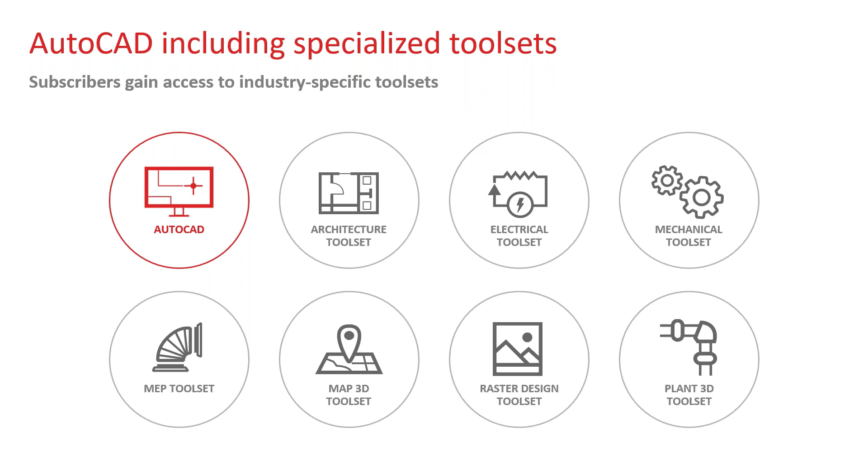So let's jump into what we're going to be doing today. Some of you may already be using full AutoCAD, the desktop AutoCAD, and you may have noticed now that you have these specialized tool sets that you can see on the screen at the moment - architecture toolset and so on. Also in that subscription, you get access to the AutoCAD web app.

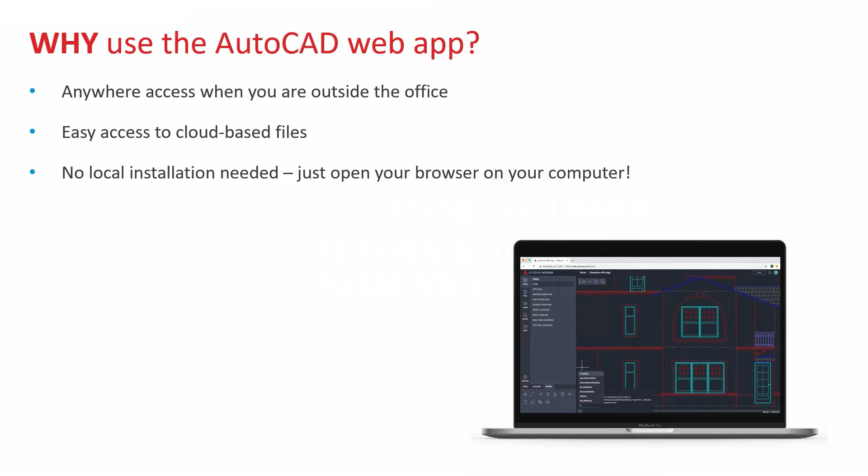First thing we're going to look at is visual fidelity. You may recognize this from a little while ago when we were doing things like annotative scaling and so on, but it's also all about how one interface looks like another. We want to make sure that the web interface of the web app is the same as your desktop interface.

It's a case of spot the difference, though it is obvious which one is which. The left-hand picture is obviously the web app, and the right-hand picture shows the ribbon of AutoCAD 2021 desktop. But I want you to look at things like the grid lines, the dimensions, the grid bubbles, the stairs and the desks. You can see they are exactly the same, and that visual fidelity is really important, because what you've got in a browser is the same quality of visualization that you get in the desktop app.

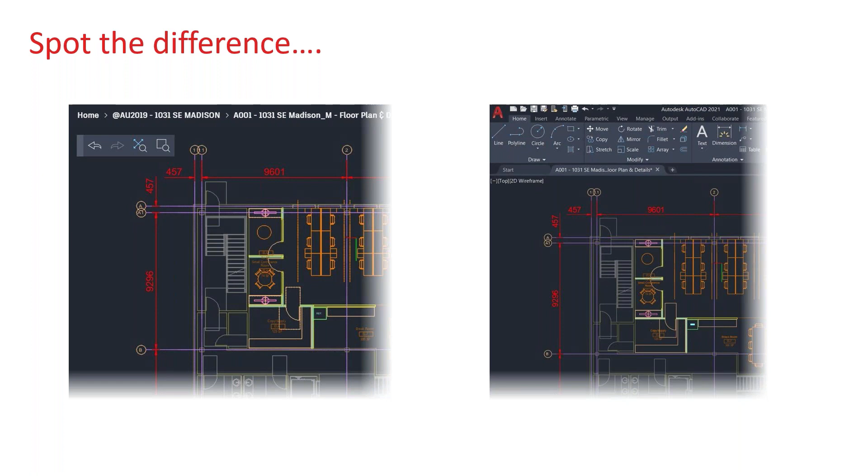Signing into the AutoCAD web app couldn't be easier. It's in a browser - you go and pick your browser that you want to use, Google Chrome, Mozilla Firefox, Microsoft Edge as well. I recommend you always make sure you've got the latest version, and it's a one-off URL, web.autocad.com. Easy to remember.

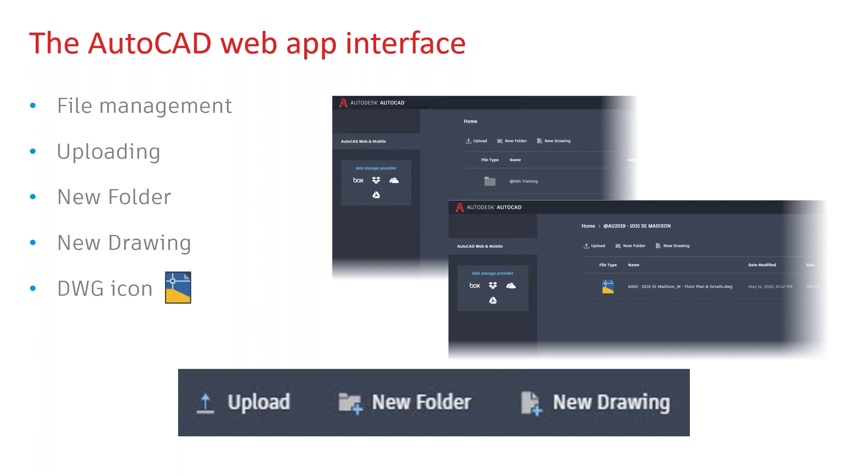Now, the web app interface, when you log in, file management is easy. You can upload files quickly and easily, set up new folders, and set up new drawings. What's really nice though is you can always spot a DWG in your web app - you can see that little blue and yellow icon in some of the screenshots I've taken, showing you're looking at the files in the web app itself. At the bottom of the slide, you've got the upload, the new folder, and the new drawing as well. So the interface is really simplistic, really easy to get to grips with.

Drafting in the AutoCAD web app, you'll recognize some of these icons straight away from your desktop app. In the Draw tab, you've got rectangle, circle, arc, line, polyline, and hatch. And the web app development team have been busy, because I noticed when I logged in today there are even more commands available on the Draw tab - you now have spline and X-line, the construction lines as well.

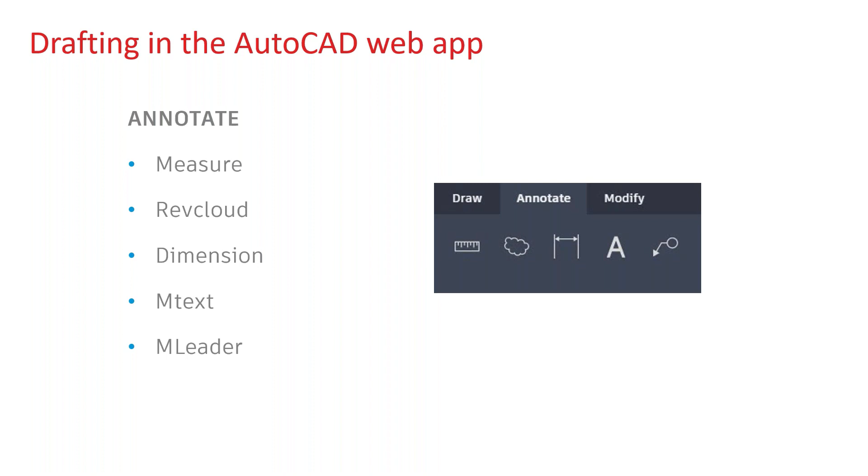Moving along to the Annotate tab, you've also got Measure, RevCloud, Dimension, MText, and Multi-Leader there. And in Annotate now as well, which isn't in the slide, you've got Viewports - that was another new one that I noticed today.

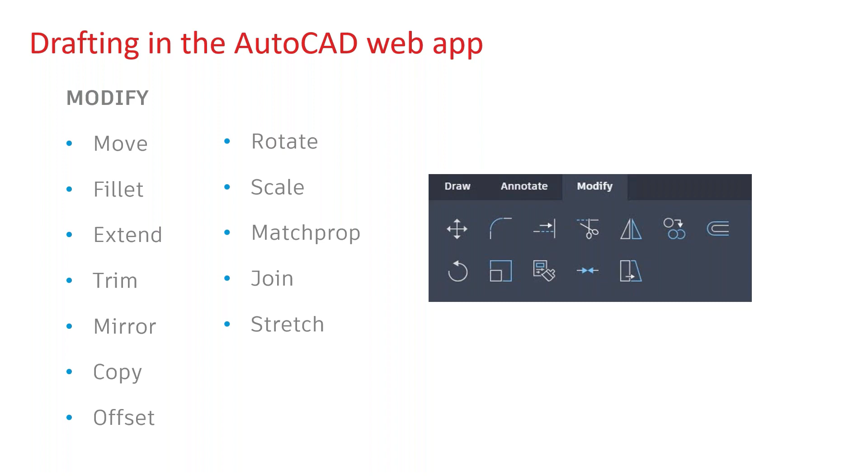Then moving along to Modify, more commands in here obviously, because you tend to spend a lot of your time modifying drawings, both in the desktop app and also in the web app. When you're working in the web app, you could be on site modifying drawings to as-built or something similar. Again, you've got a nice big long list of easily recognizable commands - things like move, rotate, extend, trim, and so on. There's also explode and erase, which are new - the web app team have added those and I noticed those today too. So they're keeping busy and developing the web app all the time.

Now let's have a little look at this. I'm going to run a little video now so that you can see how the visual fidelity and the interface and the drafting all work in the web app. So we'll be jumping into some videos as we go through the presentation. I'm just going to literally jump in and hit the play button for you, and you'll see my little pointer move around.

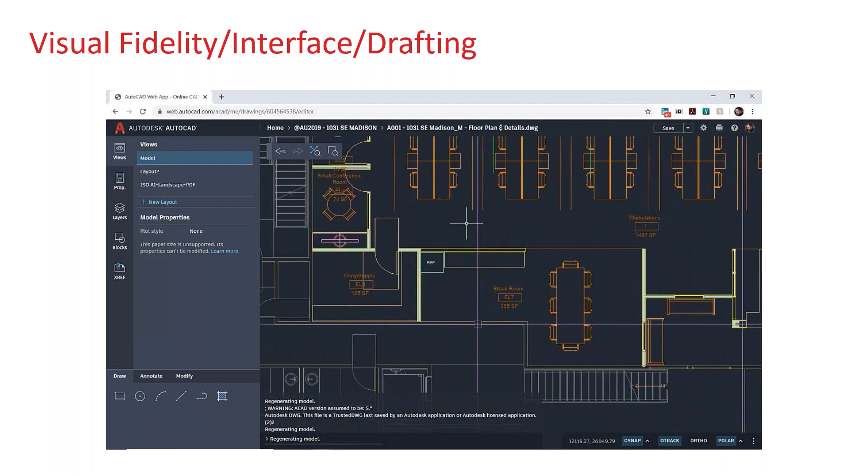So you can see I'm jumping into the folder, finding my DWG file. It's just a case of double click, and it opens up like so. You can see we've got a drawing in there, a plan with the grids, the dimensions, and so on. If you look on the left-hand side, you can see all your tabs - views, properties, layers - and you can zoom in and zoom out just like you would in the desktop app. You'll notice panning there as well. The actions are exactly the same in the web app as they are in the desktop app.

So I'll jump into the Draw tab and use the line command as you would normally when you're drafting and making changes. You'll notice it kicks in the command line as well, and you've got object snaps too. You'll notice that the visual interface, the visual fidelity there, is incredibly similar to the desktop app. So we're just drawing lines using our endpoint snaps and working our way through the drawing, making the changes that we need to make - another line there, and what we're doing is tidying up the hot desking area in the plan.

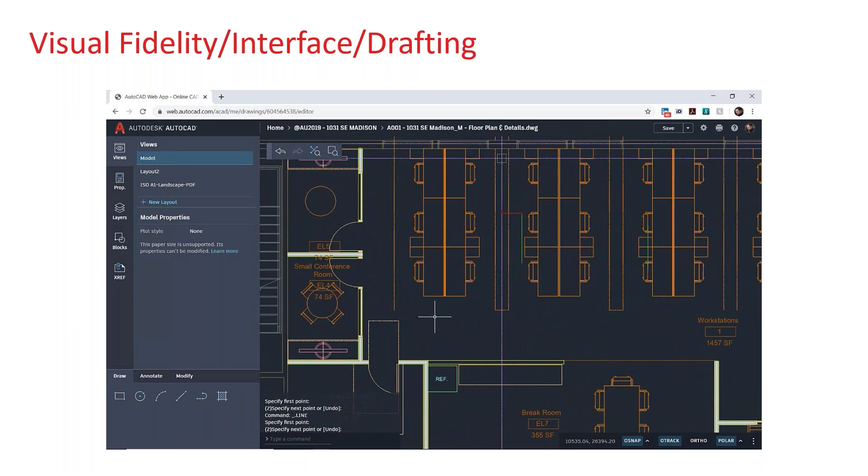And you can see as I've come away there, press enter, and it ends the line command, just like the desktop app. And as you can see, I'm panning and zooming around the drawing. That functionality is exactly the same - it's the same mouse movements, the same moving up and down on the wheel.

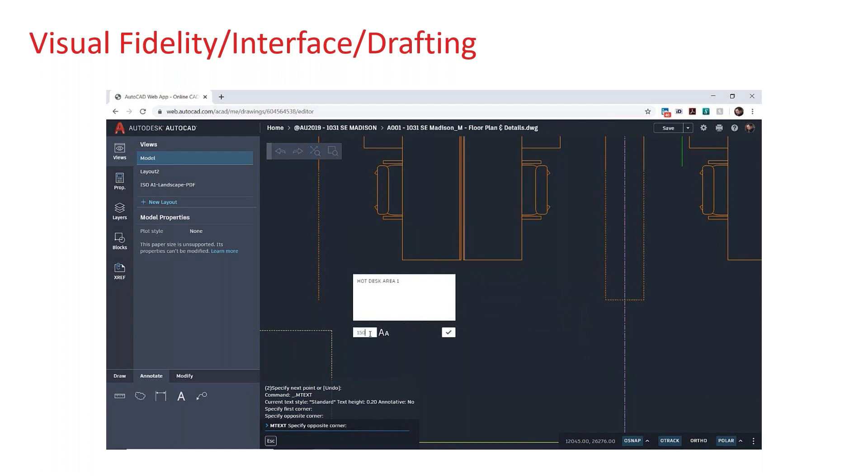So I'm going to pop some multi-line text into the drawing, and you'll recognize the box with the downward arrow, setting the area for the M text. This is where it's slightly different though - I'm typing in my multi-line text in the entry box, typing in Hot Desk Area 1, and updating the text height to 150 because this drawing is in millimeters.

And you can see it comes in with that simplex font that we all know and love. So I jump into the Properties tab, select my text, it highlights with the grips as normal, and I can change my text style to something like Arial, which gives that good old Arial font - it just looks much cleaner. You can see that the actual visual fidelity of the text is the same as the desktop app as well.

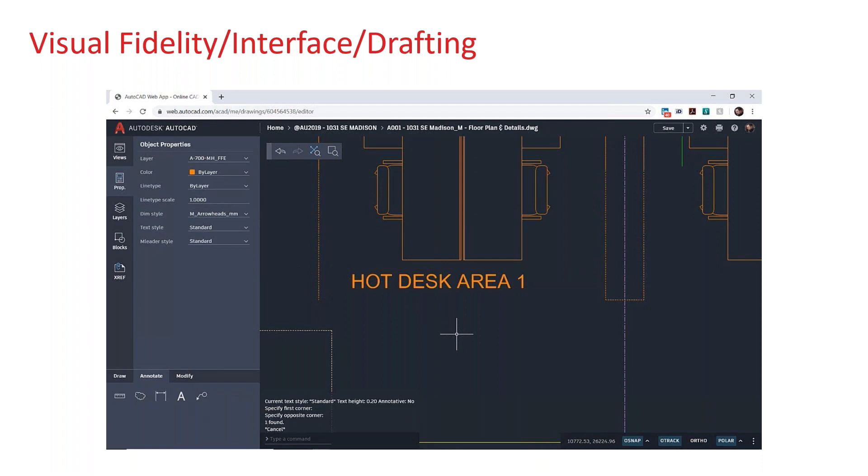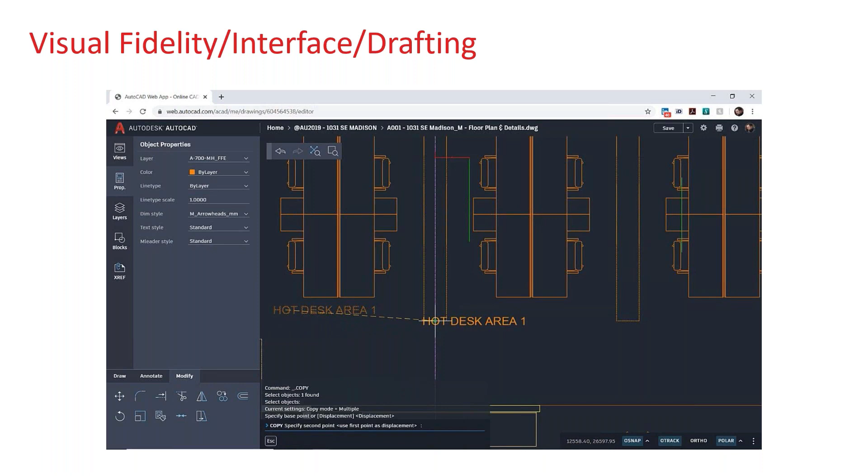Moving along, we'll add some more text. We jump into our Modify menu and copy our Hot Desk Area 1. Again a pick box appears, you select the text, press enter to confirm selection on the command line. All I've got to do now is pick a point on the text - I'm not going to worry about an object snap, I'll use my polar tracking to move it across to the right and click on a spot, then press enter to finish.

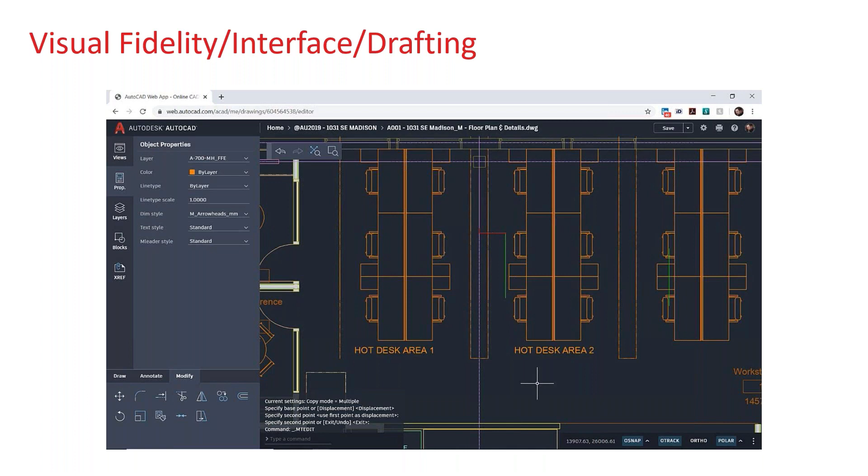Then it's just a case of editing the text, and again it's just a double click on the text, just like in the desktop app. So I'll change that to Hot Desk Area 2, check the height's okay, and tick the box. Job done. You can see it's really easy to edit your annotation and objects in your AutoCAD drawings when working in the web app - very quick, very easy, and the best bit is that visual fidelity is exactly the same as your desktop app.

So let's jump along and move to the next slide. The second thing I want to talk about is cloud-based storage. I'm pretty sure most of you are using this already - something like Dropbox, Box, Google Drive, or Microsoft OneDrive. Now the good thing is, Google Drive has now been added to the list of providers that work with the web app.

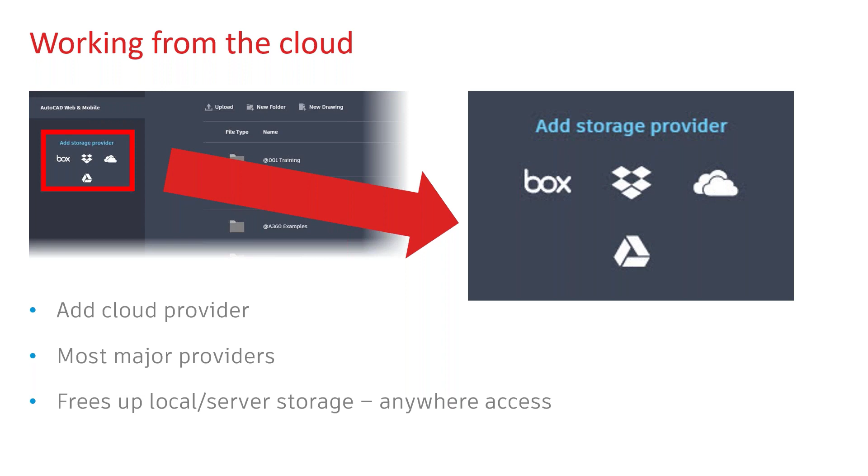When you're working from the cloud, everything can be stored remotely. You can add your cloud provider to the web app - it supports most major providers. You can see we've got Box, Dropbox, OneDrive, and Google Drive. The best bit is it frees up your local and server storage - it's anywhere access. You're storing it remotely from your laptop, remotely from your server in the office. It's in the cloud and you can access it anywhere you want. That's the best bit, the anywhere access.

As I said, Google Drive is now available, so you can easily access your DWGs in Google Drive as well. We've now got the four main cloud-based providers at our disposal. Now opening a DWG file from Google Drive is pretty much the same as if you'd logged into the web app using the default settings, but you've got to specify your provider.

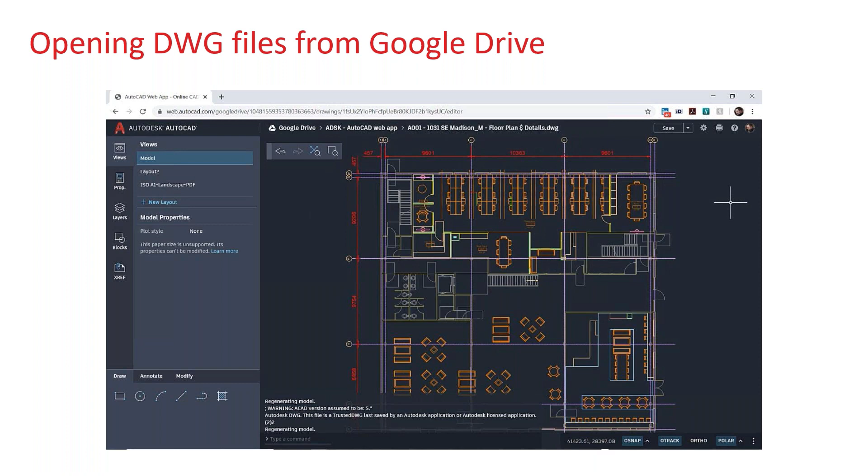We also have, third point, easy access to model and layout tabs. We all know that when we're working in the desktop app, we do all of our design work in the model tab, and then we start generating our title blocks, our viewports in the layout tabs. That's the traditional way AutoCAD has worked for many years.

But what you can do is create new layouts to meet your needs in the web app as well. You'll notice when you're in the Views tab on the left, we've got the Model tab, we've got Layout 2, which is one of the default layout tabs, and we've also got an ISO A1 landscape PDF. That's my layout tab that I've set up. ISO A1 is a metric sheet size, in landscape orientation, and it plots to PDF.

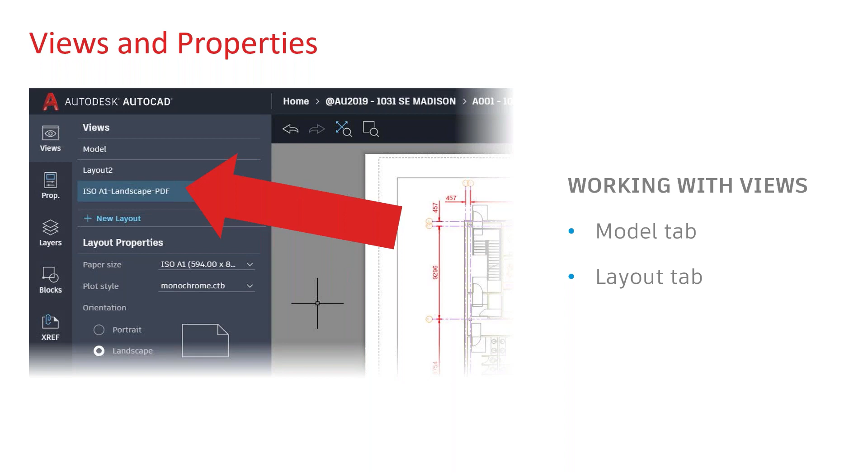So you can work with those views. You can work with your Model tab and any layout tab that you need to work with. You can also change object properties quickly and easily once you're in your model or layout tabs as well, such as the layer, color, line type scale, line weight, and transparency of objects in your DWG file when you're in the web app.

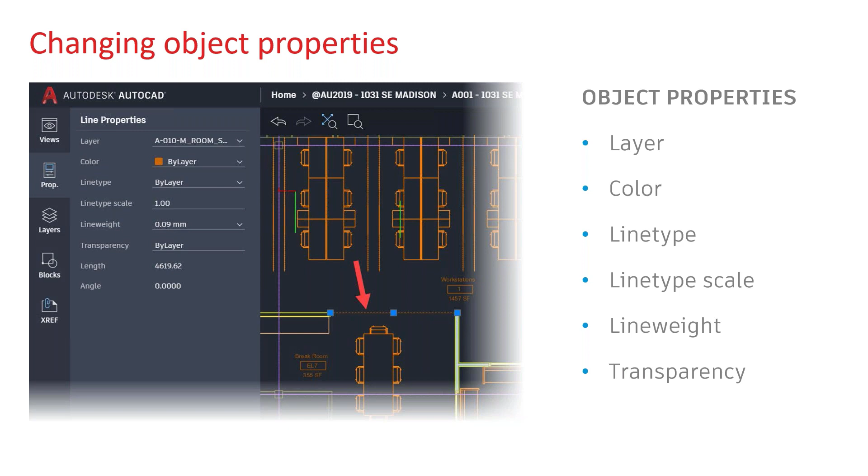Let's have a little look at that and see how all of that works. Again, jumping into another video for you here. So I'll hit the play button.

What we're going to have a look at now is the views and the properties. In order to see our views, you'll be in the Views tab on the left-hand side. You can see in this particular DWG, we've obviously got model — we kind of have to have that one, it's a given. But we've got a Layout 2, where the viewport is a little bit wonky and doesn't look quite right. And we've then got the ISO A1 landscape PDF, which is the page setup that came in from the desktop app, and you can see that's all zoomed in nicely in the viewport.

We don't need Layout 2, that's just a default one, so I can right click on it and delete it. Do I want to delete it? Yes, I do, so I just hit the delete button, and that gets taken out of our views listing on the left-hand side. So we've then got our ISO A1 landscape PDF ready to go.

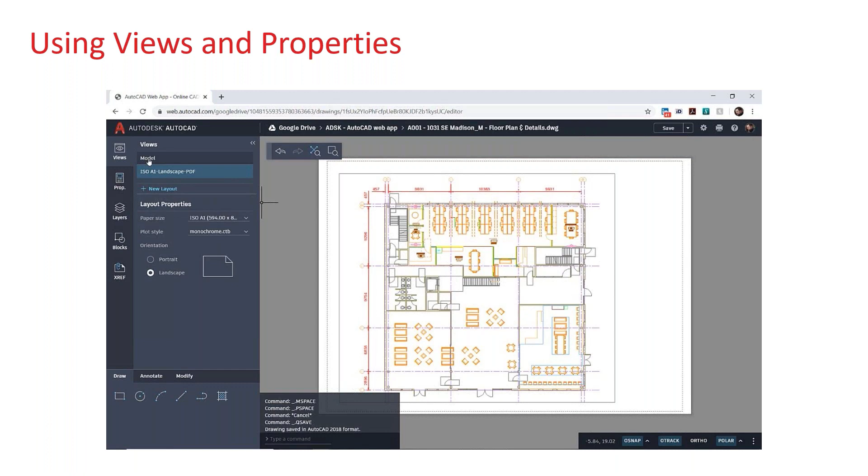We can jump back into the model tab to make design changes, and basically we can zoom in and zoom out and work in the drawing at our leisure, very quickly and very easily, like so. And what we're going to look at now is just how we change and work with the properties.

So we go to the Properties tab on the left, and I can select an object, and you can see that desk there is a block reference, and it's on a particular layer, particular color. You can see the name of the block there, the scale X and Y.

And also I can add objects. So if I pop a line in here and just jump from endpoint to endpoint very quickly, I'm not too worried about the actual layer or the settings of that line object. But when I select it, you can see it's selected with the blue grips, and you can see the line properties in the properties menu on the left-hand side as well. It's very quick and easy.

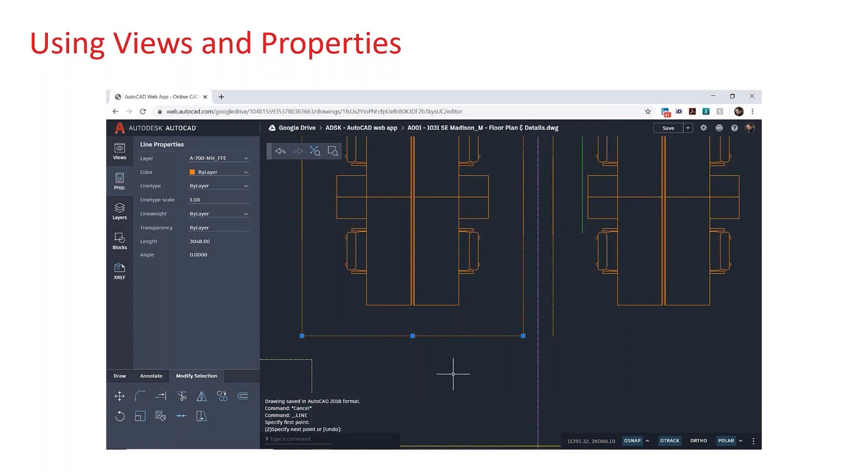What I really love about the web app interface for views and properties is everything's on the screen in front of you. You can't miss it. It's always there. And it's just a case of clicking on an object and you can see the properties straight away, as long as you've got that properties tab set up as the current tab on the left-hand side.

Command line. Now, I'm an old school AutoCAD user, and I always use the command line in the AutoCAD desktop app. Your command line is in there in the web app as well. It's AutoCAD, and it's in a browser. So your command line is in the browser as well.

What's available on the command line? Well, we have our good old suggestion menu, where we can type just a few letters of the beginning of a command, and it'll let you know what commands are available. You can see that in the lower of the two images there. So I've typed line, and you can see it's given me all the commands I can use that have the letters L-I-N-E in them.

You've also got keyboard shortcuts. So I could type PL for polyline and press enter, and it would kick in the polyline command. You'll notice in all of the commands you've got the escape button on the command line. And also when you're in a command context, you've got the undo option. You'll notice undo in the line command in the upper of the two images in the slide.

If you want more commands in the AutoCAD web app, let the web app team know. Get onto those forums, get onto the web app development team, become a beta tester if you want to as well. Join the AutoCAD community and beta test the web app. I do that. I've been doing it for the last few years, and it's good fun. It's good fun to see things that you've talked about and developed in beta coming into the product, like the drafting commands I mentioned earlier.

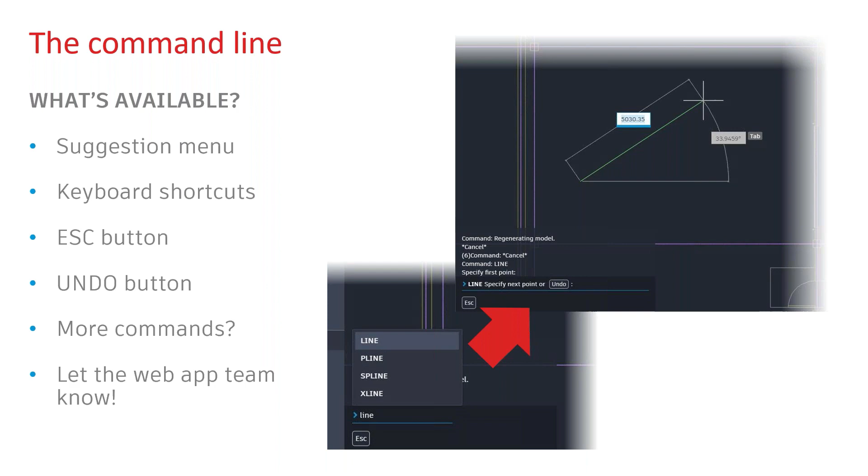Polyline, you'll notice there. So we've got the polyline, you've got the suggestion menu. I mentioned the PL there. I've typed PL, and you can see that it's come up on the suggestion menu, and the keyboard shortcut is PL and then enter. You'll notice you've got the arc and undo options when you're in the polyline command, and you've got the good old escape button on the command line as well.

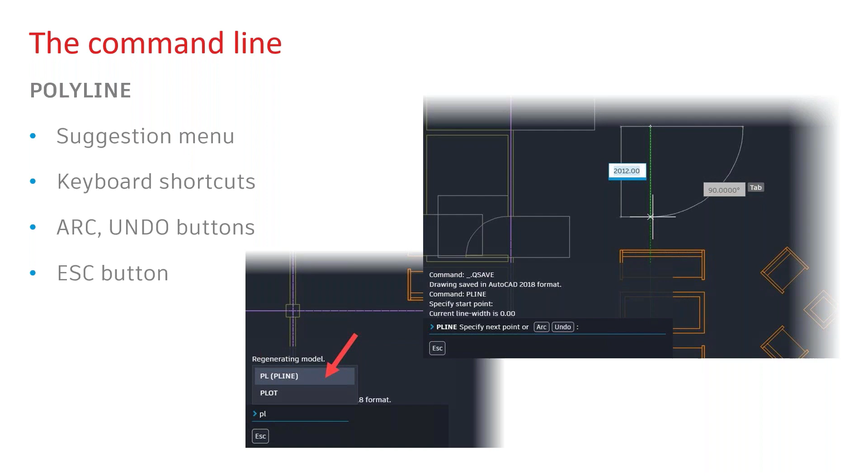It's the same with the rectangle command. You'll notice you've got the suggestion menu, the keyboard shortcuts. You've also got a dimensions button that you can click on and specify the dimensions on the command line of your rectangle. You've also got the escape button as well. You'll notice as well on that upper of the two images that I can enter the dimensions of the rectangle visually on the screen using the dynamic input as well.

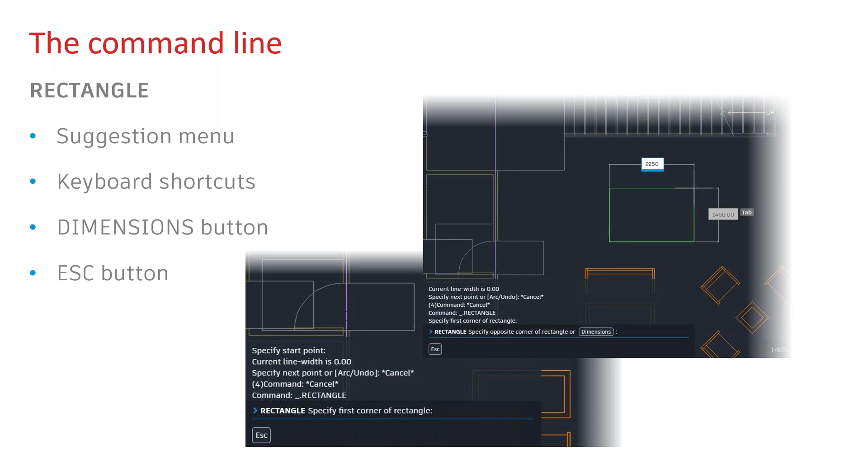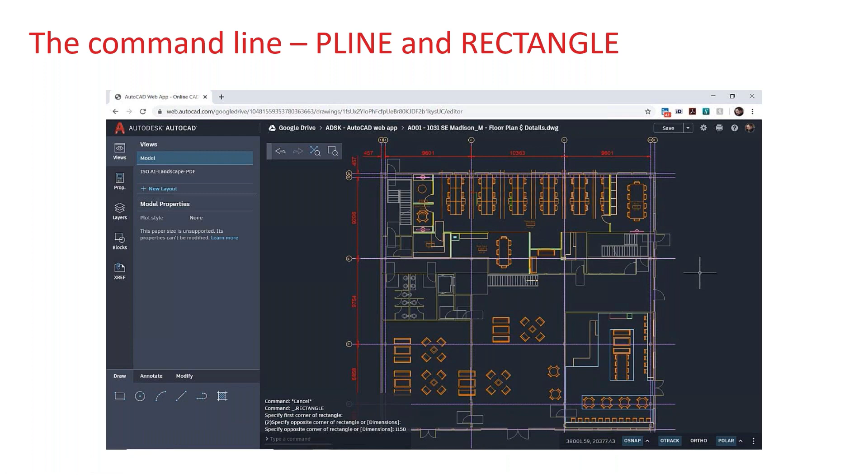Let's have a little look how polyline and rectangle work in our drawing. We're back in the same DWG file in the web app, and I'm just going to hit play to run the video quickly. What you'll find is when you're working with commands such as polyline and rectangle in the AutoCAD web app, it's actually quick and easy.

You zoom into where you want to go. So we're zooming in just into the entrance hall area there of the building. And we're going to create a polyline on the floor to represent a distance to step away from the door. It might be, in the current coronavirus situation, a social distancing floor marking perhaps. So I'm going into the draw tab, and as you can see there, I'm selecting P-line, polyline, and we're going to work our way through generating a polyline on the floor there.

And all we're going to do is use our object snaps. So there's an endpoint snap that I'm going to click on. Moving along to the next endpoint snap, and I click again, just like you would in the desktop app. I can then happily come down to arc on the command line. Bear in mind, it's also got the right click shortcut menu to do that as well. And as I come down, I'm utilizing my object snap tracking to get the end of that arc.

And I'm selecting line on the command line, going back into line mode in the polyline command. And I'm coming up to the point where I started, and you'll notice I'm going to right click now and close the shape. So that is now a closed polyline. And I can check that really quickly by going into properties on the tab there and selecting the polyline. You can see it's got polyline properties and it's got its length and its area.

And yes, it is closed, showing there in the properties listing on the screen. I can just hit escape on the keyboard to deselect that. Then I might jump into the rectangle command, very quick and easy in the web app, exactly the same workflow as you have in the desktop app.

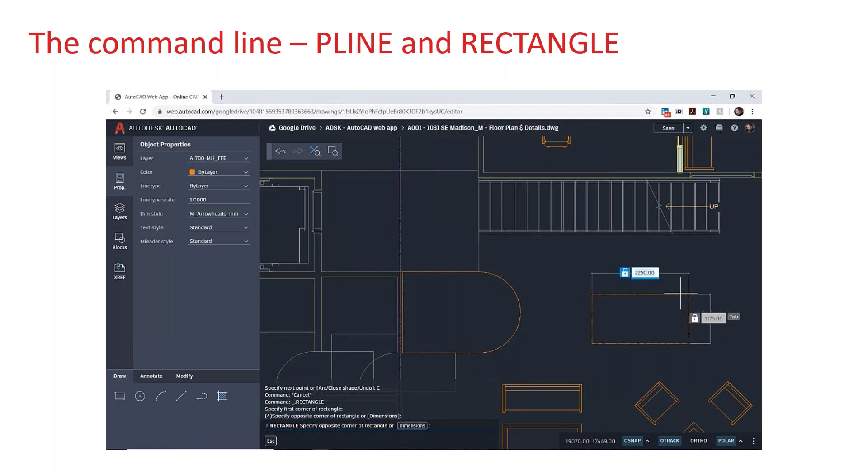I pick a start point of the rectangle with a left click, and then I drag, and you can see the dimensions appearing automatically around the rectangle on the screen. I could have clicked on the dimensions button on the command line, but I'm actually entering those using the dynamic input, and every time I enter a dimension, I hit the tab key to lock them both down. Then all I've got to do is left click and confirm to AutoCAD that that's my rectangle. And I've drawn a table, perhaps in the entrance area as part of the entrance foyer of the building. Very quick and easy.

And you can see that the workflow is pretty much exactly the same as the desktop app.

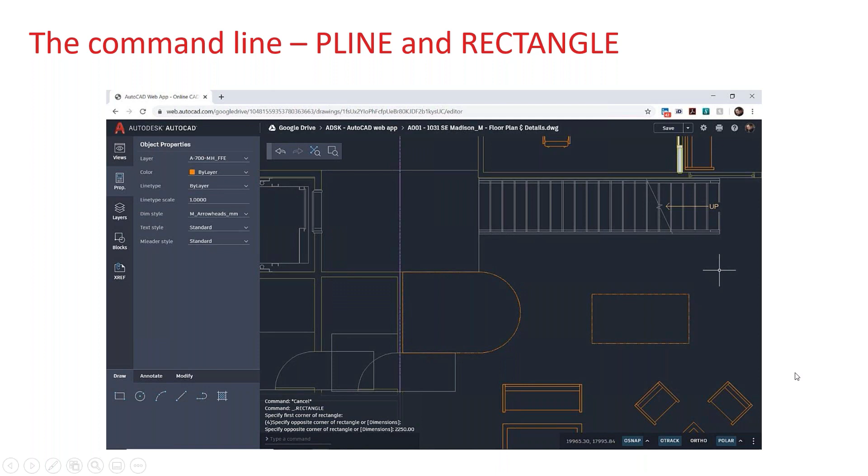Layers are fundamental in AutoCAD. I can remember working with thousands of layers when I worked in industry on various projects, and you want to be able to lock those layers, color them so that they stand out, and also check the visibility of the layers, and make sure that they're doing what they should in the drawing itself.

So there's an entire layers tab on the left-hand side menu, as you can see there. When you click on layers, you get a big long list of all your layers available in your DWG file in the AutoCAD web app.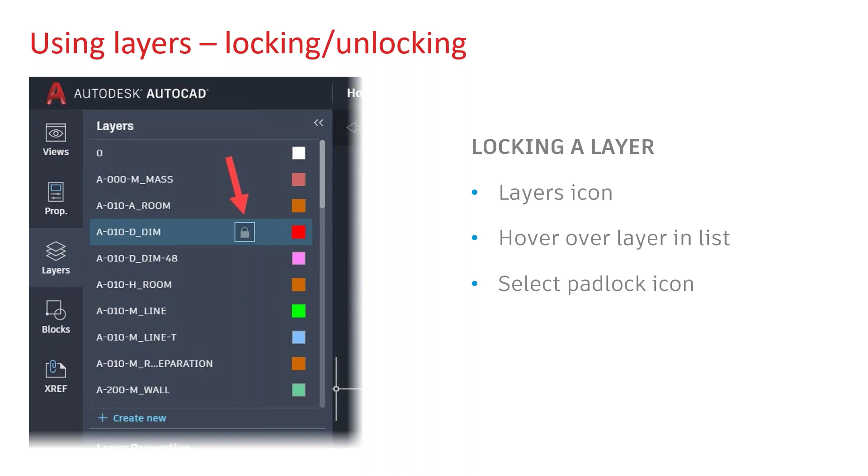So to lock a layer, you simply hover over the layer name. You can see it's a dim layer there, and you'll see a little padlock symbol highlight. You can just click on that and then that stays switched on. So if you see any layers with a padlock next to them, you know that they're locked.

It's the same with visibility as well. Again, you hover over the layer and you can see there's a little light bulb icon there. You just click on that light bulb icon, and when it's on, you know that the layer is actually switched off in the DWG file. When you don't see a light bulb icon, you know that the layer is on in the DWG file.

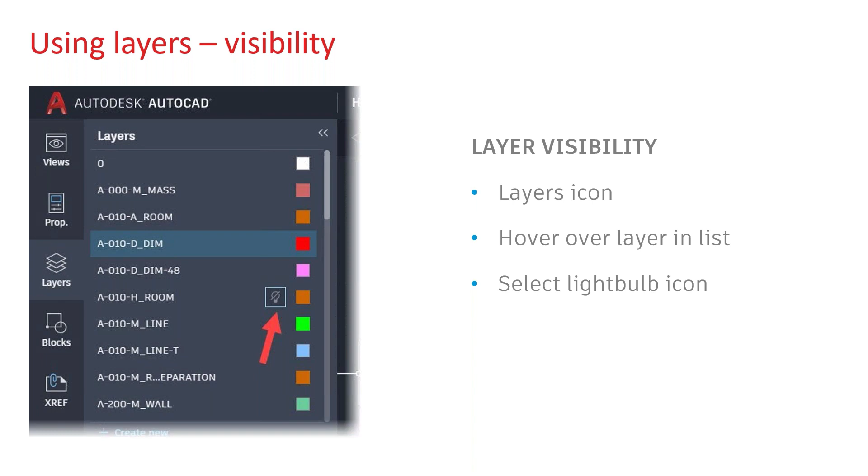New layers, there's a create new at the bottom of the layers area in the menu, and you just click on create new, and just like the desktop app, it starts at layer 1. You put your layer name in, and be careful there, when you do put your layer name in, it will automatically put it down the alphanumeric list.

So you might think to yourself, where has my layer gone? Just use the slider bar on the right of the layer menu, and you'll be able to slide up and down to find your new layer name. What I'll do now, just to show you how that works, we'll jump in and have a look at how the layers work in a DWG file in the web app.

So we're in the same drawing, same DWG file, but I'm in the layers tab on the left-hand side. So you can see our big long list of layers there. And if I use the slider bar, you can see we can slide up and down and find all the layers available to us in the drawing itself.

So you'll notice, for example, that room layer has the light bulb icon. That indicates that that layer is currently off in the DWG file.

So I'm going to look at my dimensions layer there, and you'll notice that it's red at the moment. I want to change that to make it the purple color that the grid lines are. There's the colors available in the drawing. I find the color to match it, which is actually color 191. So all I've got to do is click on that, and it all matches and looks consistent in the drawing itself. Very quick and easy to change colors, very similar again to the desktop app.

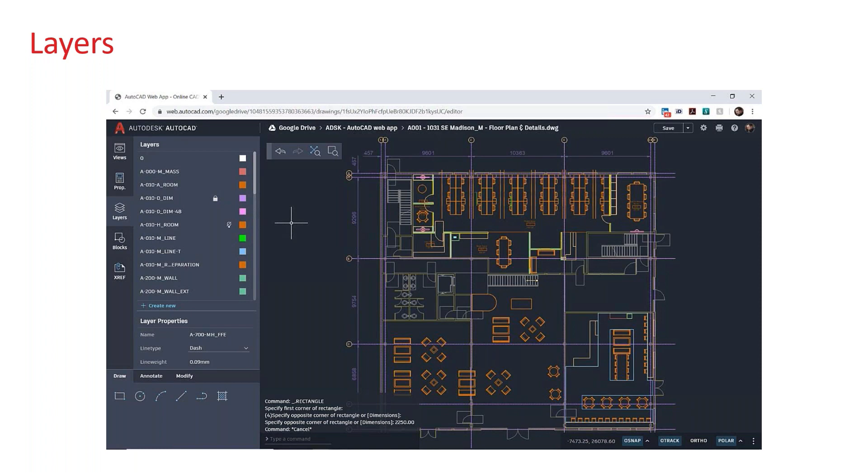Now we're going to have a little look at settings in the AutoCAD web app. The settings are really important, and we've got to make sure we're setting things up appropriately to work in the web app itself. The settings icon is in the top right of the screen, a little gear wheel - that's why I've put that great big red arrow there so you can't miss it. When you click on it, it brings up this dialog box with the settings at the top, so it's called the settings dialog box.

You can see that we can set things in there like tracking, object snaps, units, and navigation, and I want to take you through these and show you how they work. It's really important that you get these settings correct, but more importantly, ideally you want them to match your settings in the desktop app as well, so that when you jump from one to the other, you've got peace of mind knowing you've got the same object snaps running in both. It's actually really easy to set up - you click on the little gear wheel and off you go. I'm going to show you how that works now on the screen in a video as well, so you've got a visual idea of how it works when you sign into the AutoCAD web app yourselves. So I'm going to hit the play button, another video for you.

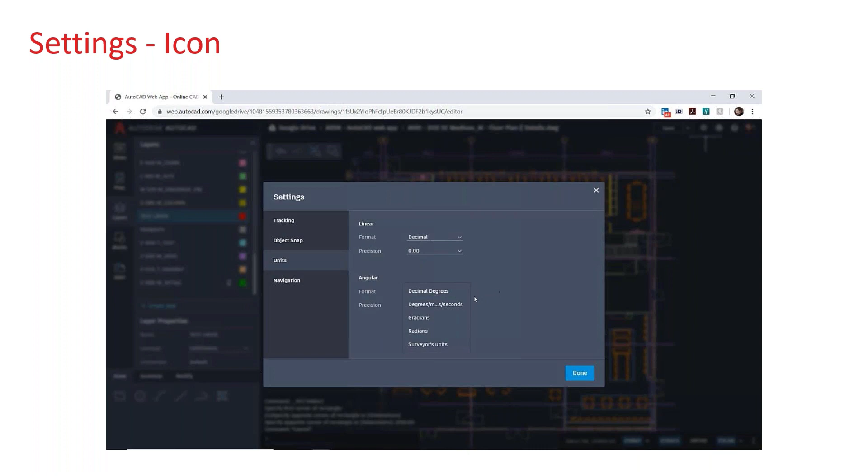Then you've got degrees, minutes and seconds, all the way down to surveyor's units - again the same display settings as the desktop app. So decimal degrees, my standard setting there is normally 2 times what I use for linear, so it would be 4 decimal places. Now navigation is a bit of an interesting one because you don't get this on the desktop app. Your standard zoom direction in the AutoCAD desktop app is the zooming in and out that you're normally used to - that's the standard setting in the web app.

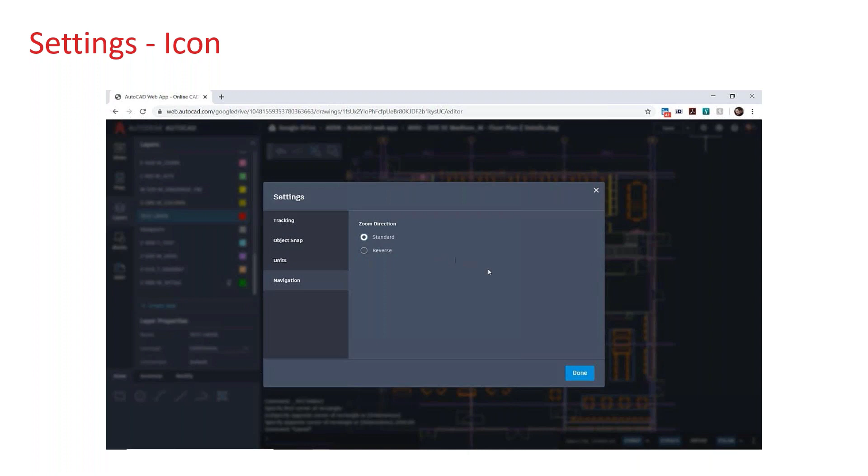But if you want to reverse that, you can, and you can just set it to reverse if you wish. So that's how to set up those settings very quickly and easily in the web app.

Now, we've talked about generic settings in the web app. What about drafting settings? Things like you see on your status bar down in the bottom right corner of your desktop app normally. So what you've got available in the web app is coordinates, OSNAP (object snaps), object snap tracking, ortho, and polar, which is your tracking that we talked about a moment ago in the settings.

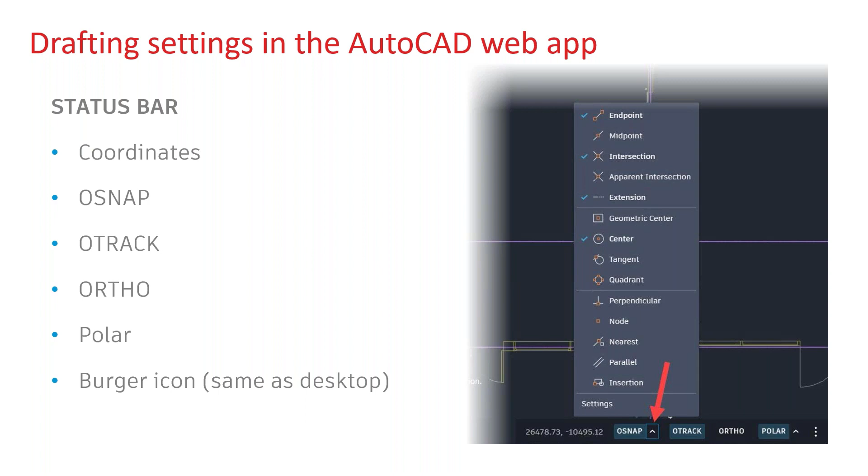And we've got the good old burger icon, as I call it, same as the desktop - those little 3 dots in the bottom right corner. In your desktop app they're like 3 little lines, which is why they're jokingly called the burger icon. What we can do here, as you can see in the slide, is go in and switch on these different drafting settings to display on the status bar. More importantly, when they're displayed, we can go in and edit the settings.

So again, another video for you, and I'm just going to jump in and hit play. I'm going to come down to the burger icon and click. And when I click, you can see that all of them are switched on at the moment.

Coordinates, I can turn it off, click again, turn it on again. Object snaps, I can turn it off, turn it on again. And then I click on the little 3 dots to lose that menu.

And you can see now that I can go into OSNAPs or object snaps, and you can see my running object snaps are the ones ticked with the blue ticks. Very quick and easy, and I can switch, say, midpoint on if I want to use that as well as a running object snap. Hit the little fly out arrow, and I lose the menu.

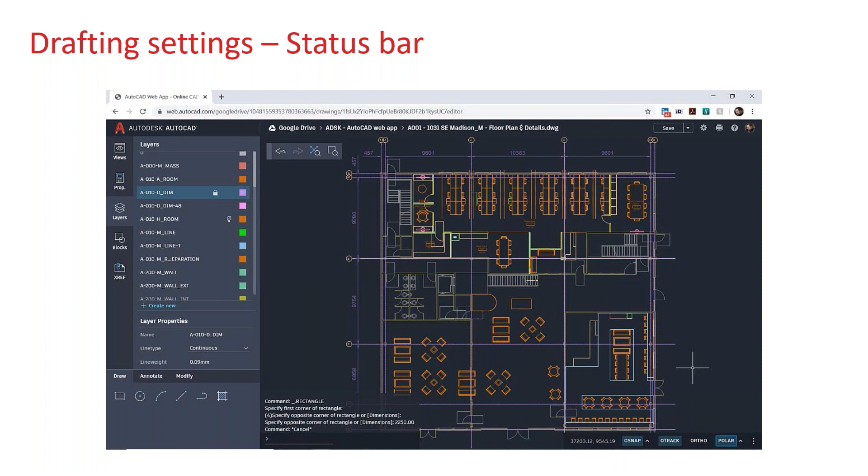O-Track is simply an on-off toggle, as it is in the desktop app, same as Ortho - it's just an on-off toggle there. And you'll notice that Polar switches off when you switch Ortho on. You've also got a little fly out menu on the Polar, which allows you to change your angle increment if you need to. Notice you can also set that in the settings on the little gear wheel at the top of the screen in the web app, like I mentioned earlier.

So, number 6 - yes, snap overrides. They are available in the web app, and they allow you to override those running object snaps when you need to. Now, I use snap overrides constantly, especially when I'm creating video learning content for LinkedIn Learning. Snap overrides are my go-to snaps. So I have a minimum number of running object snaps, and then my snap overrides allow me to override those and go to any snap I want on the list.

And it is all on that right click. Now, just be aware there's a little workflow here in the web app that is subtly different to your AutoCAD desktop app. It is simply a right click - there's no shift and right click like there is in the desktop app. It's just a right click, menu comes up, you select snap overrides, and off you go. It's on the shortcut menu, on the right click of the mouse, and it includes all of your object snaps.

And you override the running object snaps just like the desktop. And you can see them all listed nicely there in your list, ready to go.

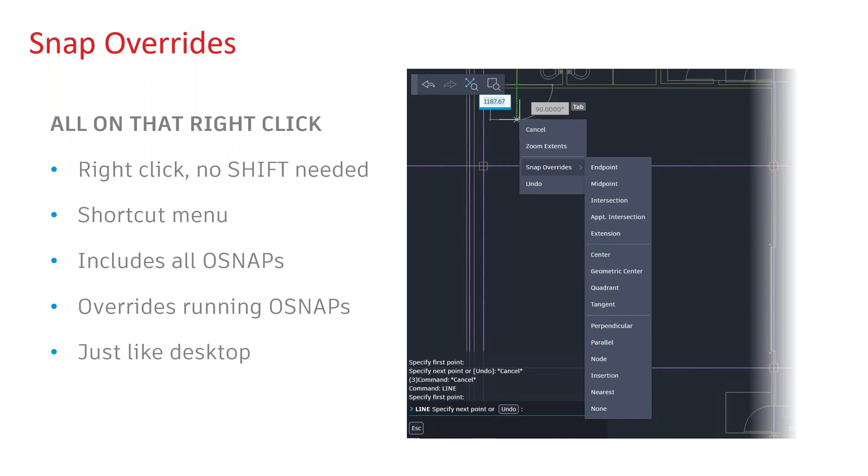And again, we're back to another video. What I want to show you here is how the snap overrides work. I really think this is rather slick, actually, in the web app. It works really well. It's a nice, quick, easy to understand right-hand click menu as well. So let's run the video for you, and we'll hop in and get that running.

You'll notice I'm jumping down there checking what is available in my running object snaps. So what I'm going to do now is start drawing some elements in the drawing and placing some objects using my object snaps. Down to the draw tab, click on the line command. I'm basically going to draw a line and utilize my object snaps accordingly, but I just right click so I can use a snap override straight away. Midpoint is not one of my running object snaps.

So now I'm using a snap override of midpoint, and I'm coming across using my object snap tracking to get that intersection, enter to finish, and I've drawn my line. Quick and easy using the snap overrides.

Now, if I come down to the OSnap again here, you can see that I've got various ones switched on. What happens if I turn one of those off? Let's say intersection. So if I turn that off and then come down and hit the little fly out arrow there and switch it off again. So intersection is now not a running object snap anymore.

So I'm going to go to my line command again. And what I want now is a line coming off of the midpoint of the line I've already drawn. So it's a right click, snap overrides, midpoint. And that is now my snap override. It finds the midpoint for me.

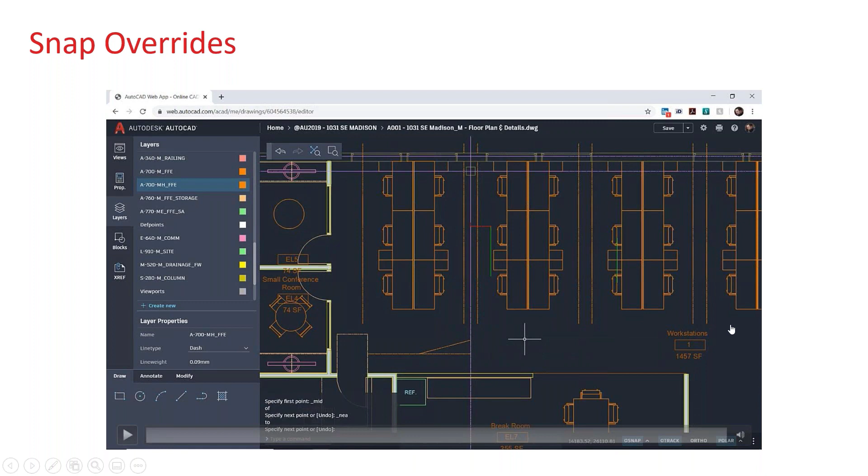Now, I work with a lot of blocks. I work with a lot of external reference files, the XREF, and they are both supported in the web app, which means you've got the functionality you need for content reuse. You can use your blocks, you can use your reference files.

And the benefit you have in the web app is you've got a blocks palette. Now, in later versions of the desktop app, you've got the blocks palette in there as well, and you can see it looks remarkably similar. And what's lovely about the web app is you've got the blocks tab on the left-hand menu on the left-hand side. So there's block support in the DWG file that you've got open in the web app.

You've got blocks libraries that can be stored in the cloud because we've got cloud support as well, and it coordinates with the desktop. So if you think about it, if you're using a cloud-based repository for your blocks, you can access that both in your desktop app, but also you can be anywhere you want to be with the web app, and you can coordinate with the same blocks you're using in the desktop by using your blocks library in the cloud.

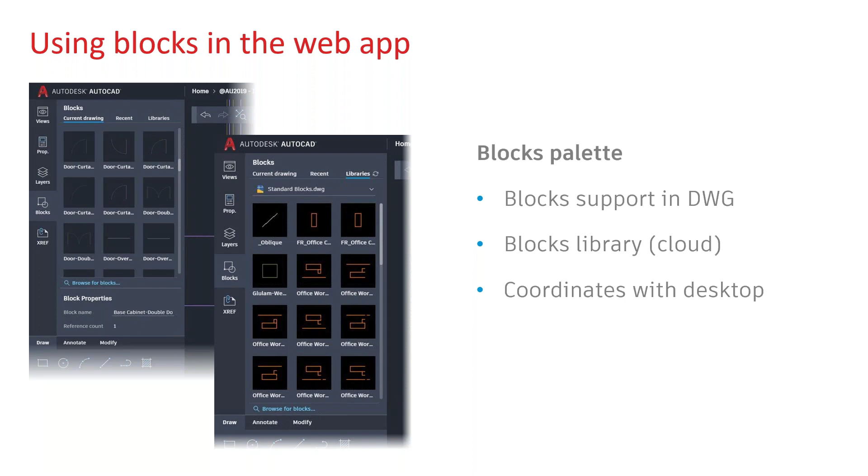The XREF support is great as well. It's just like in the desktop. So you've got the XREF support in the DWG files. So you'll notice there, XREF tab in the menu on the left, and you can see there that the XREF is highlighted by the little dash line.

So it's all that furniture in the entrance area of the building, and you can see that the XREF file there is called entrance furniture_layout.dwg. And you can see the status is resolved, i.e. it's found the XREF. You've got the size of the XREF, it's an attachment, and it's found at such and such a location, indicating a relative XREF file path.

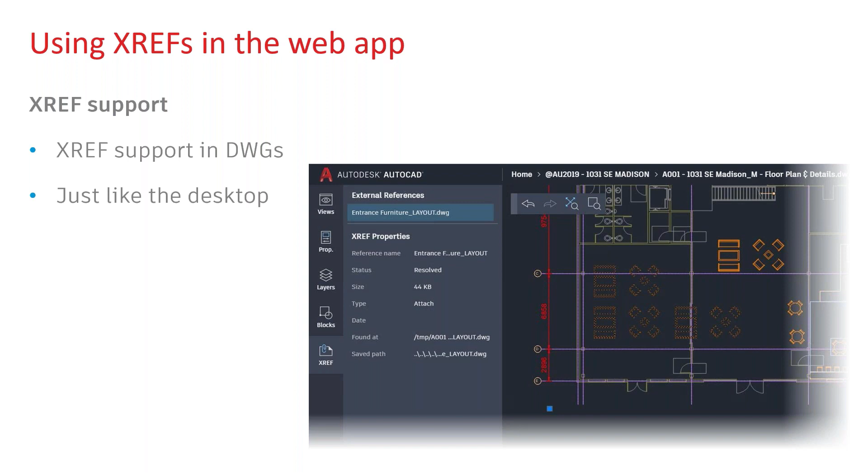So it's quick and easy, and it's just like the desktop. You can attach an XREF to your DWG file in the web app itself.

So let's have a little look at these blocks and XREFs and see how they work in the web app itself. So you can see we're in a drawing, and I've got the video ready to go for you, and I'm going to hit the play button.

So you can see we've got a block there that represents a door and a door opening, and you can see there that I can select it. And if I go to properties on the tabs there, it tells me it's a block reference, gives me the layer, the color, the line type, etc.

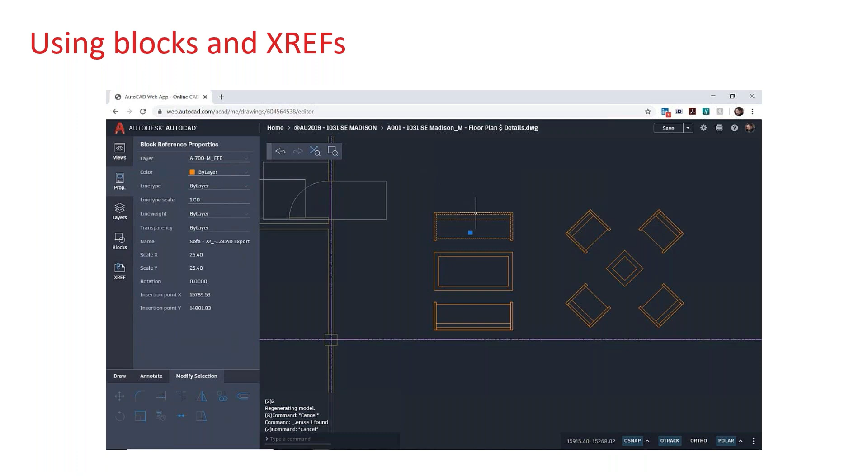And again, I've got a sofa there. It's a block reference, gives me the name, the scale, the rotation, the insertion point, and so on, just like in the desktop app.

So if I go back to blocks now, the blocks available here are the ones in the current DWG file, saved with that file. I can create a new block if I want, and you'll notice a slider bar there, like with the layers, where I can slide up and down to find a block to insert into my DWG file.

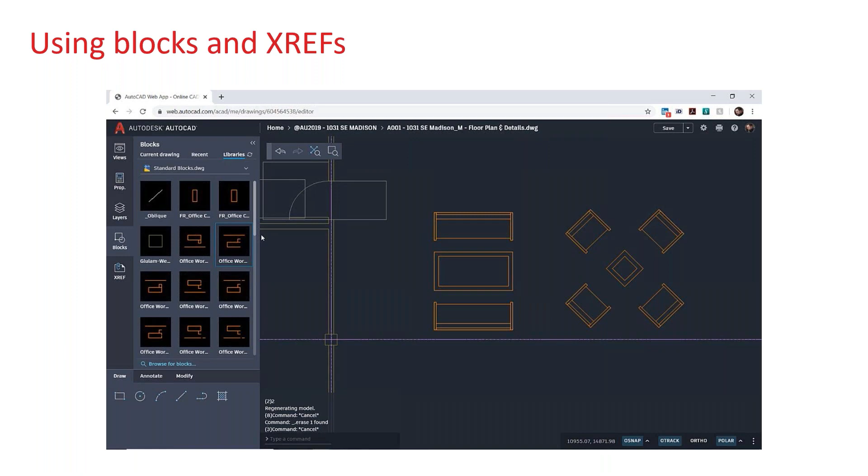If I go to libraries, you can see we've got standard blocks.dwg, with a location there for it. These are blocks stored in a DWG elsewhere in the cloud. The benefit is everybody has access to those because they're in a cloud-based location, so I can coordinate with the desktop app with people back in the office.

Now you'll notice all those bits of furniture being clicked on down there in the entrance foyer are all individual blocks. But what about XREF support?

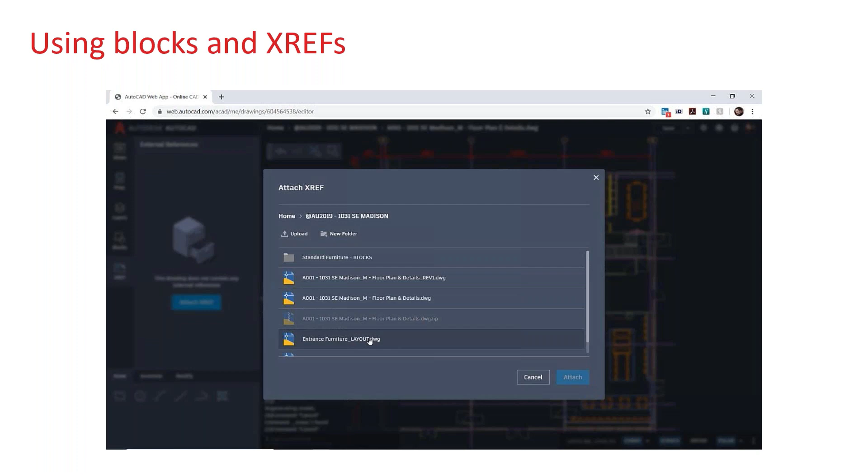Maybe I want to bring in an XREF that I can put on top of those blocks. You'll notice I've got entrance furniture layout, the one I mentioned earlier. All we do is select that file and click attach. Now I'm going to use 0,0 as the point where the XREF is inserted, since I've set it up that way. So I type in 0,0 on the command line, press enter, and that drops into the DWG file. You can see it's slightly faded.

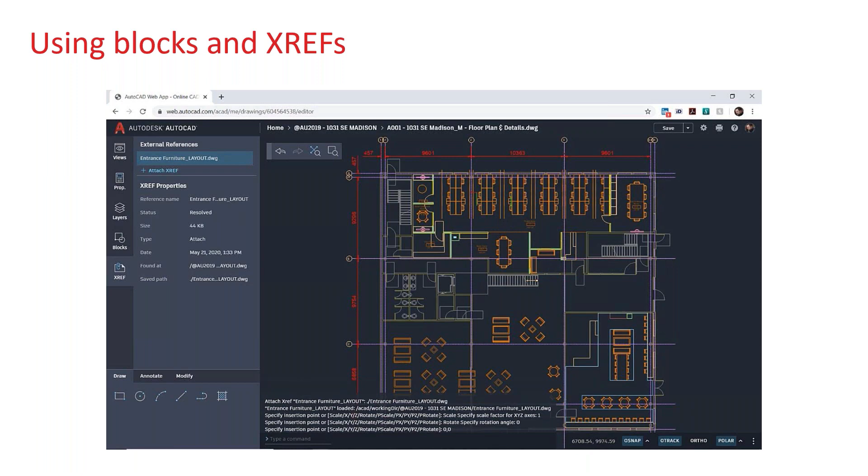But if I zoom in now and select that furniture, like so, you'll see it's all one XREF. It's telling me it's got external reference properties, the layer it's on, and so on. It's very quick and easy to do, but the best bit is you've got that XREF support available in your web app drawings.

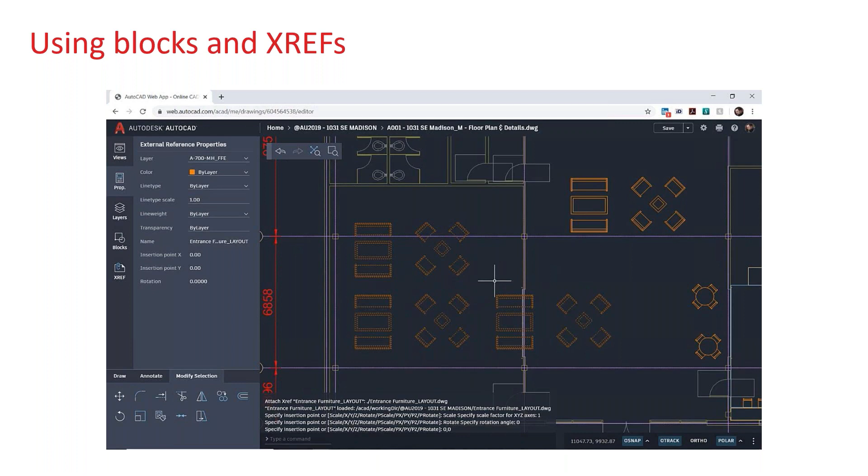Moving along now, we're going to look at how all the AutoCAD tools work together.

Now, I've talked mainly about the web app and mentioned the desktop app as well. There's going to be a case where you're working out on site, perhaps using the web app, with internet coverage, jumping into your browser to edit your DWG file. But don't forget, before you go out on site, you want to save your DWG files to the cloud so the web app can access them. So how does that work?

Well, when you open your AutoCAD desktop application, on the quick access toolbar there are two new icons. They've been around for the last few versions of the desktop app, called Save to AutoCAD Web and Mobile and Open from AutoCAD Web and Mobile. When you use them, there'll be a small desktop driver installation, quick and easy, lasting about 30 seconds, and it's a one-time install. You might get updates if a new version comes out, but it's really quick and easy.

And what you've got is these AutoCAD Web and Mobile folders are your own centralized cloud location, specific to you and your Autodesk account. So when you sign in to your Autodesk account in the desktop app, you'll have access to AutoCAD Web and Mobile, which means you can save and open from it using these little dialog boxes that pop up when you click the respective icons.

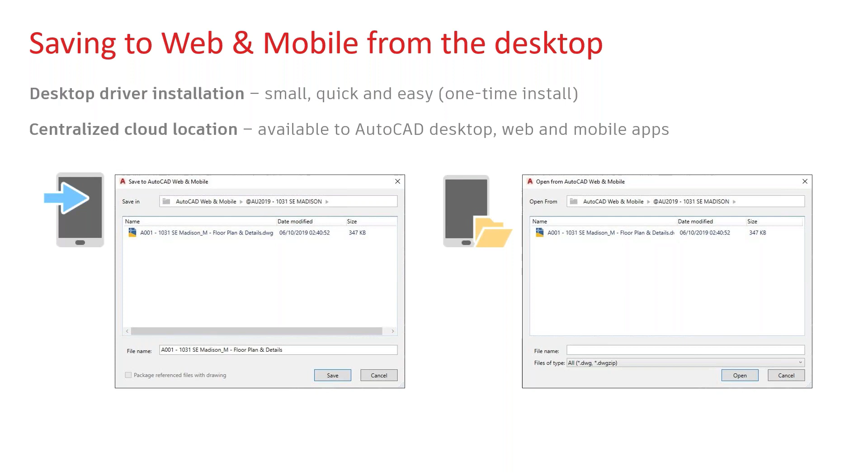You can then also save back to the desktop from the web app using Save or Save As. You can save back to Web and Mobile with the standard settings I've mentioned, or if you're running in Google, Dropbox, or OneDrive, you can save back to your cloud provider too and go into drawings via your desktop app that way. So how does that work? Well, Web and Mobile, when you head back to the desktop, is very quick and easy.

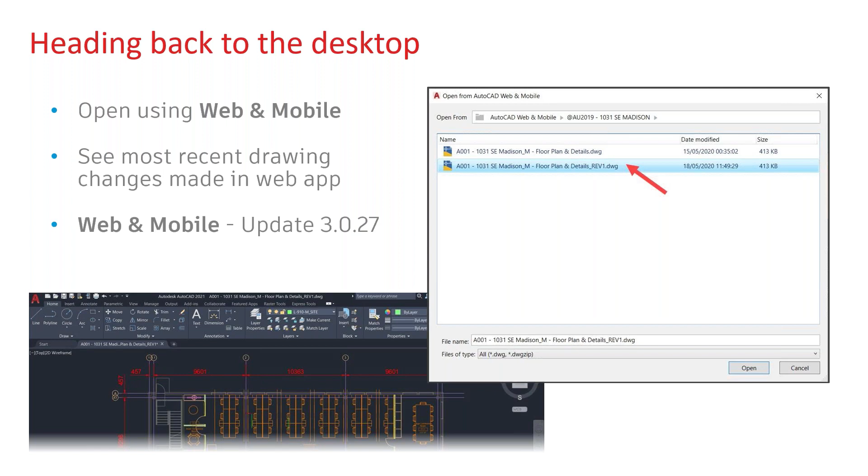Make sure you see the most recent drawing changes made in the web app. So if you save a new revision of a drawing, such as Rev 1 as highlighted in the slide, you can open that up in your desktop app once you've made the changes in the web app. Be aware that Web and Mobile update 3.0.27 came out only a week or so ago, so you might get an update kicking in if you've been using Web and Mobile in your desktop app as well.

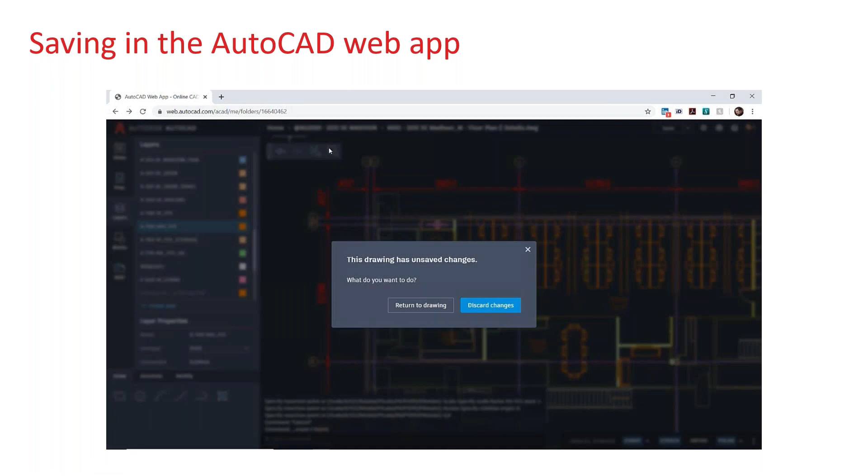We have another little video here for you to see how you save in the AutoCAD web app first. So we've got our drawing open, and what happens if I hit the back button in the browser? It tells me there are unsaved changes in the DWG in the web app. So I can return to the drawing and go up to the save icon, top right of the web app screen, next to the little gear wheel where you change your settings.

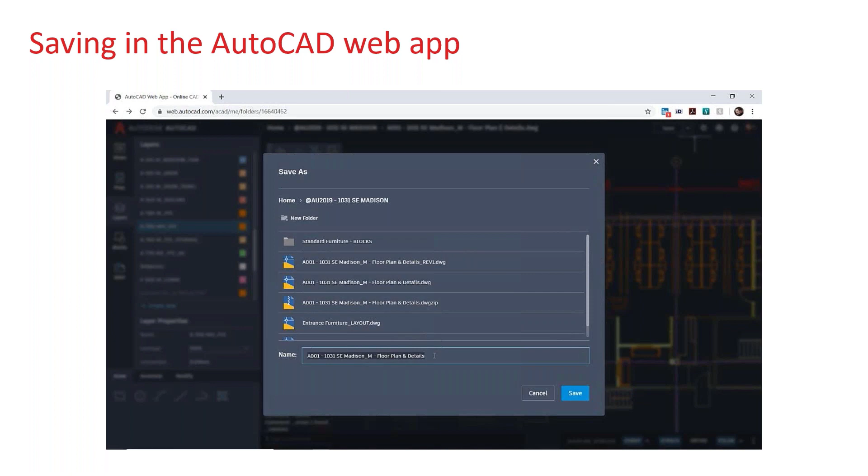So you've got save, and if you just click on save, it's like a quick save, same as the desktop app. I can also do a save as, so now I'm saving to AutoCAD Web and Mobile. You can see the name of the file at the bottom of the dialog box, so I'll just add the new revision number, underscore Rev2 for revision 2. All I've got to do is hit save, click on save, and job done. It's now saved and it updates. You'll notice at the top of the screen it's now the Rev2 drawing.

So I've now saved that in AutoCAD Web and Mobile. And I've got this really bad habit - I will now go to save, click on save, and make sure I've done that, and do a quick save as well. You can see the Q save kick in on the command line in the web app. It's just a little habit I've got into over the years, just to make sure I've saved that file with that particular file name. So when you click on save, like I mentioned, it's like a Q save, just like the AutoCAD desktop app.

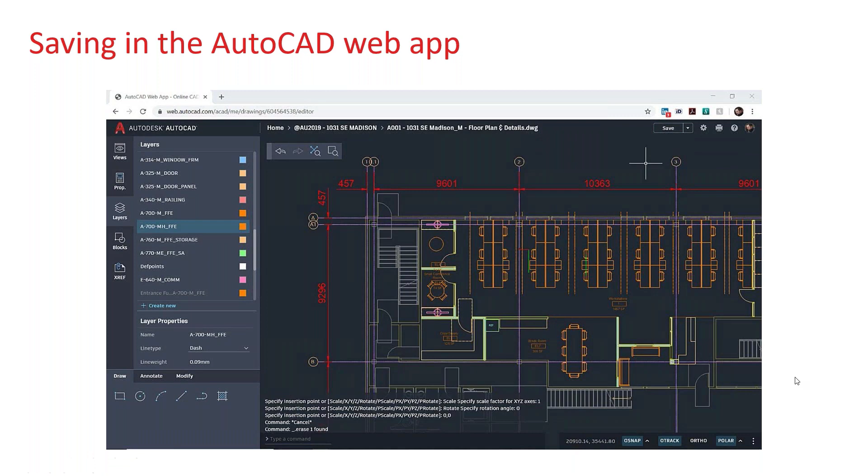Let's run the video and see how we can open up a file we've just saved in the web app, opening it now in the desktop app. So I go to open from Web and Mobile on the quick access toolbar. There's the dialog box, and I go to the folder where my drawings are, double click there, and there's my Rev2 drawing. I select it, down to the open button, click on it, and my Rev2 drawing opens up in the desktop app quickly and easily. Any changes I've made in the web app will now be reflected in this revision 2 of the drawing. So I zoom extent and I'm ready to start drafting in the desktop app this time.

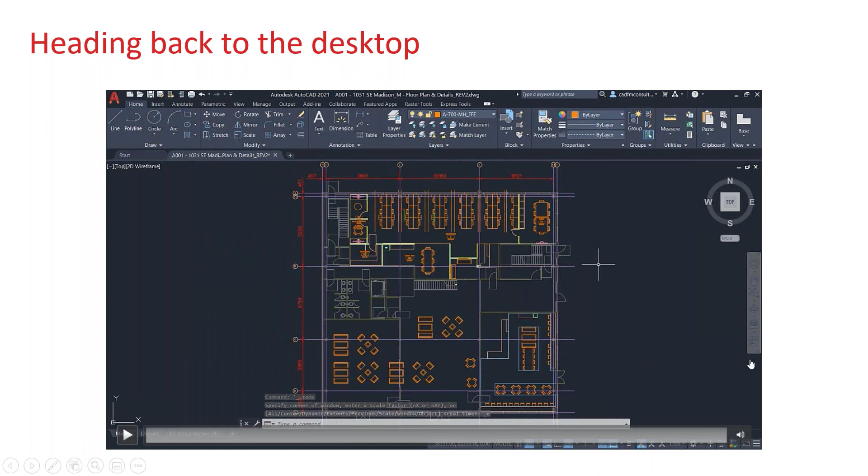Communicating your design with others is extremely important. Communicating that design intent to let people know what your design does, how it's going to be built, what color it is, what size it is - really important.

One of the things you can do with the web app is plot to PDF. So you've got your communication and collaboration kicking in now. You can plot from the web app quickly and easily. It only plots to PDF, the good old Adobe portable document format. And you can also plot your model tab or your layouts that you've got set up in your DWG file in the web app.

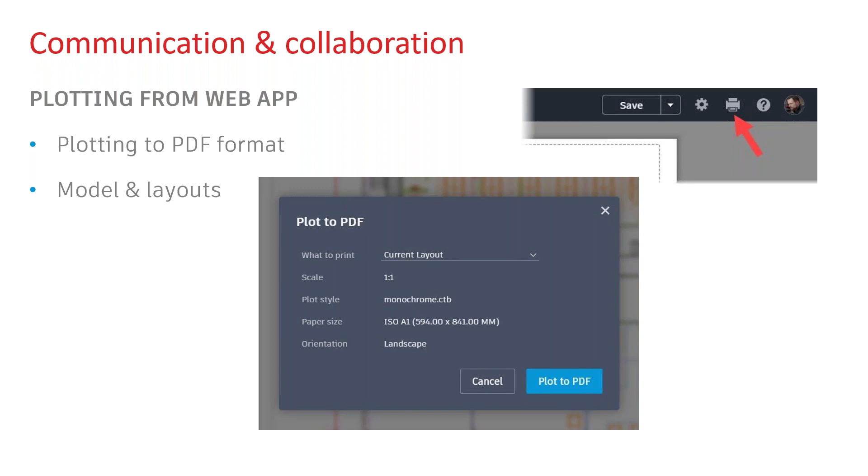It plots to PDF and I save that PDF in a known location. You'll notice there, communicating design intent. It will tell you that your PDF is ready, and you can see there that you just download the PDF and store it wherever it needs to go.

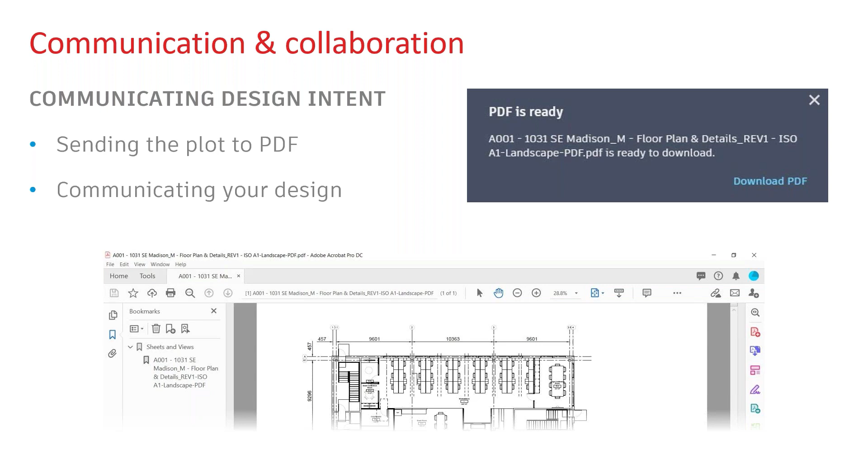Just underneath that, you can see I've got a drawing open in Adobe Acrobat Pro DC, as it's called now. You can see the resolution is really nice and clean using that monochrome CTB color table setting in the web app to plot to PDF as well. It's really nice, and it does kick out some really nice drawings. I've been using that quite a lot recently, and the PDFs generated from the web app are clean and exactly the same quality as the desktop app.

So let's have a look at how we communicate our design intent. I'm not going to expect you to watch me saving a PDF, but I just want to take you through visually where you find the buttons and how they work within the web app. I'm just going to run a very short video.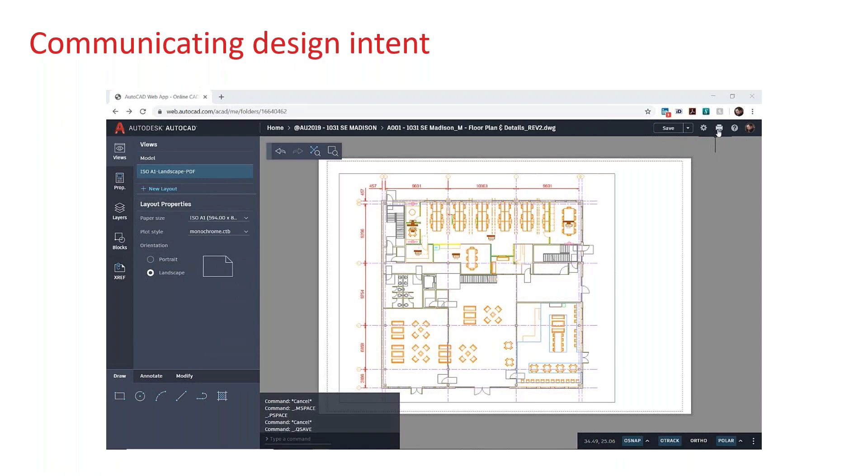You'll notice there that I'm in the Views tab, and there's my ISO A1 Landscape PDF. There's the layout properties set with that particular layout tab. I can change the paper size if I want to, and then all I do is hit the plot to PDF icon. There's the plot to PDF dialog, and I select the setting, current layout, or whatever I want it set to. There's all the settings I want to use, and I simply hit the plot to PDF button.

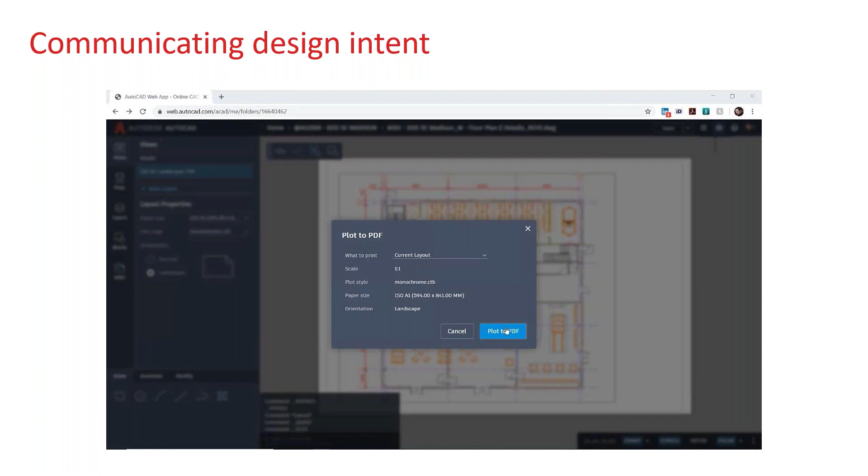Now, it's part of your AutoCAD subscription. So if you're using the AutoCAD with Specialized Toolset subscription, you get the AutoCAD web app with that. You can go and check it out at any time just by signing in with your Autodesk account. Also, in the current coronavirus COVID-19 scenario we're in at the moment, it's also part of the extended access program, so make sure you check out the AutoCAD web app.

All it needs is for you to go to that URL, web.autocad.com, and you can see there that you just sign in with the credentials you use with your Autodesk account. And you can then start creating drawings in AutoCAD in a browser. It's very quick and easy.

Don't forget you've got the help screen as well. So if there's anything you're not sure of, you can jump into the help screen and interrogate it, search for what you want. What I love is they've created a Hitchhiker's Guide to the AutoCAD web app, the same way there's a Hitchhiker's Guide for the desktop app. It's one of my favorite parts of the help screens for AutoCAD. You can see as well, you can go to basics, geometry, modify, etc.

Don't forget as well, you have the Autodesk Knowledge Network, the AKN, at knowledge.autodesk.com. You can see there that you can search for functionality in the AutoCAD web app as well. Make sure you are logged in with your Autodesk account, because you can potentially create favorites and save them so that you can go back to them again later.

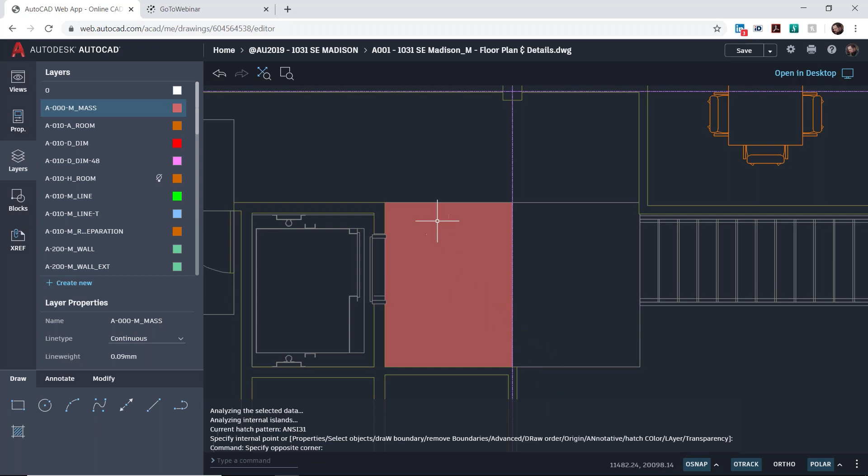Now, our hatch there, if I select it - let's do it slightly differently. There we go, and what I'll do is remove that grid from the selection set like so. So I've got my hatch selected. If I now go over to properties, there's my hatch properties like so.

You can see the scale is set to a default of 1, which on a metric millimeters drawing is a little bit on the small side. So let's change that scale to something in the region of 10. Press enter, and you just keep changing that scale until it suits, otherwise you'll end up with what looks like a solid fill.

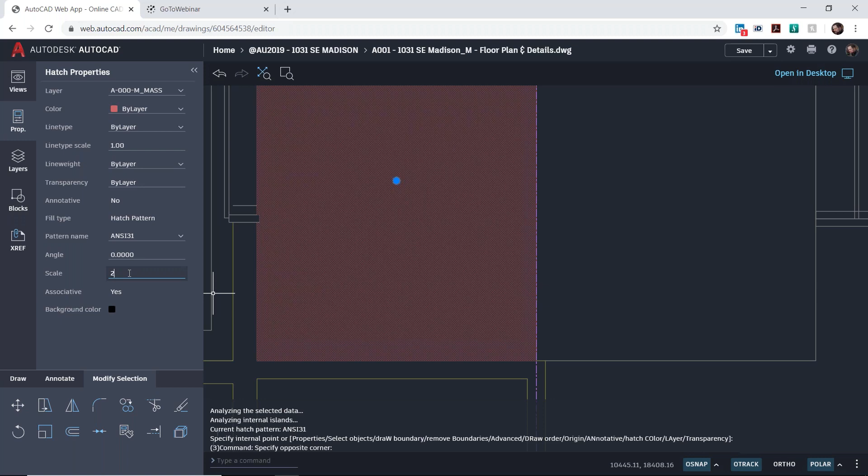So let's try 50 - that should work, and you can see the resolution starting to change. Again, it's that black art of hatching - you want to make sure that scale works. I'm working up from 50 now, so let's try 150, and there you go. It's gradually figuring itself out, but it takes a little bit of time, just like it does in the desktop as well.

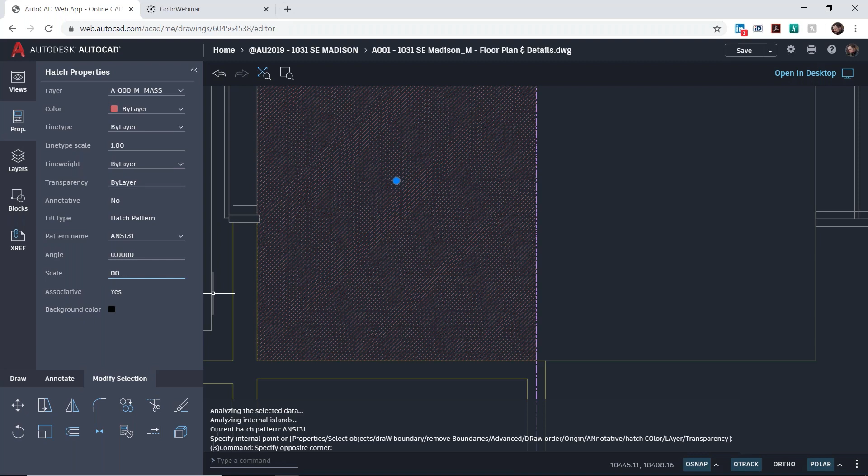I'm going to try 500 - that would probably be a more sensible number. And there you go, there's the ANSI 31. Hit escape to deselect, and I've hatched that area nice and quickly and easily. It's the usual black art of hatching though, same in the desktop app - you play around with that hatch scale until it looks sensible on your drawing.

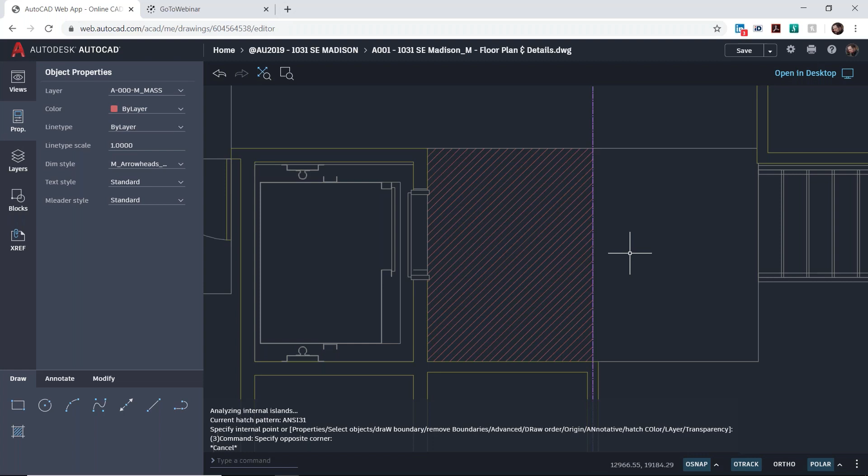We had a question about when accessing the layer tab, is the search magnifying glass available? It's useful when knowing a partial layer name. So let's jump into layers. As you can see, all I've got is the slider bar, so I can come down here and it's just a case of sliding up and down. There doesn't tend to be a search option yet. However, like I said about commands and so on, if you want that search box at the top, let's ask the web app development guys now while we're online. We'd like to see a search bar at the top of the layers panel.

There's a question I wanted to address about the web app being available for students. It is available for students right now as part of the Extended Access Program. It's important to note, though, that we are considering student access going forward. Yeah, excellent, I think it's a great idea.

There was a question about if the drawing is not in the cloud, where does it need to be located on the local computer you are using? If you're using your desktop app, the regular AutoCAD, it might be on your C drive, your D drive, your server - it's going to be in a known physical location. So if you want to make sure your drawings are available for the web app, in the desktop app you want to be signed in to your Autodesk account, and go to the quick access toolbar and use the save to web and mobile icon. That will save it to your localized bit of the cloud that's accessible through your Autodesk account.

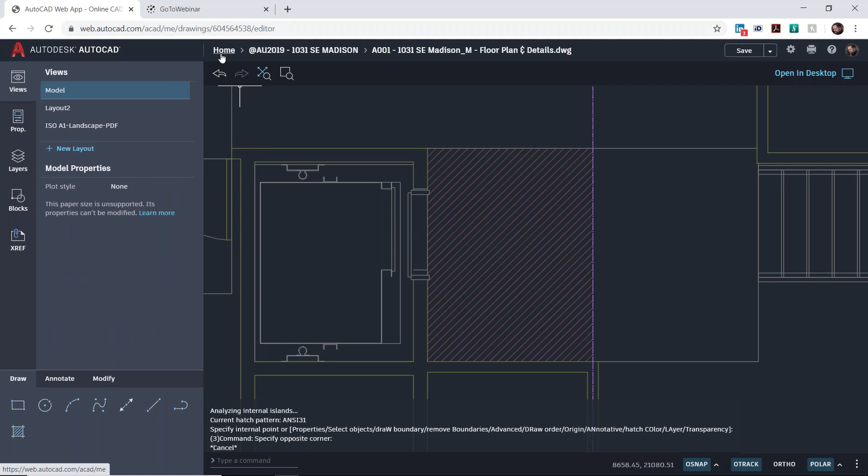Then when you sign into the web app and go into the list of drawings that appear, you'll see it says AutoCAD Web and Mobile on the left-hand side of the screen. If I jump into here, see, I've got all my settings here, but if I go to the home at the top - I'm not going to worry about the changes there, but you can see that AutoCAD Web and Mobile. So if you save the drawing to Web and Mobile from the desktop app, when you go into the web app, it'll be in here.

Don't forget, you can generate new folders, create new drawings from scratch in the web app, and upload existing drawings from known locations. So you can upload drawings if you're in the web app on your desktop PC, or you can upload from things like Google Drive and Dropbox as well, if you need to.

Our final question for today, are palettes also possible with the web app? Are we talking tool palettes and the like? Yes, that's all the information I was given on that one. At the moment, no. Again, it's another feature I would love to see - tool palettes made available in the web app. That would be great. And it would be even better, just so the web app development team know, to have exportable tool palettes as well. That would be very cool.